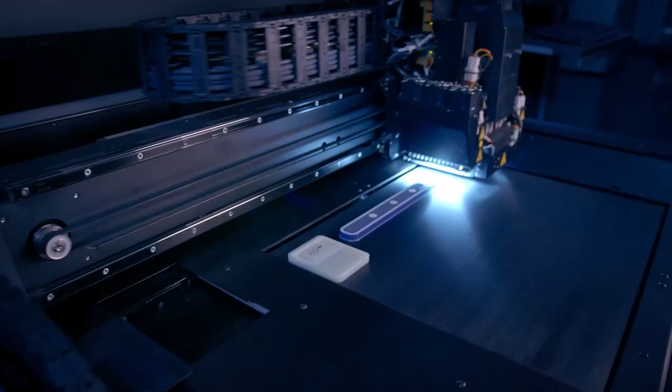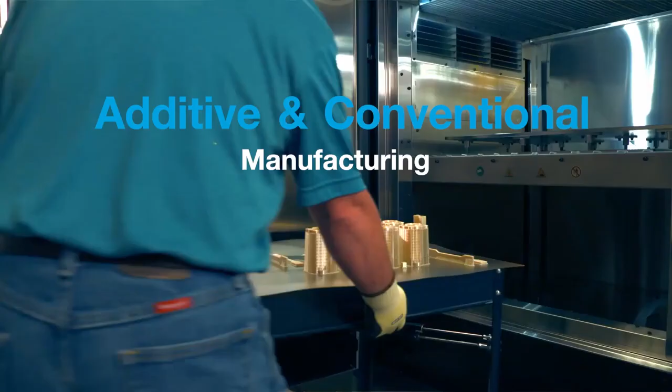Stratasys Direct Manufacturing is the leader in advanced manufacturing and 3D printing services. We have more than 30 years of experience in additive and conventional manufacturing, providing rapid prototyping and production parts backed by highly skilled experts.

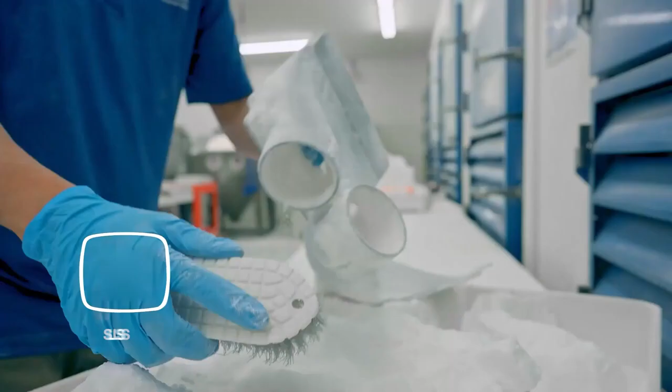Stratasys Direct allows customers to design, innovate, and meet demands of any scale by providing access to FDM, PolyJet, stereolithography, laser sintering, SAF, MJF, P3 DLP, as well as conventional technologies such as injection molding.

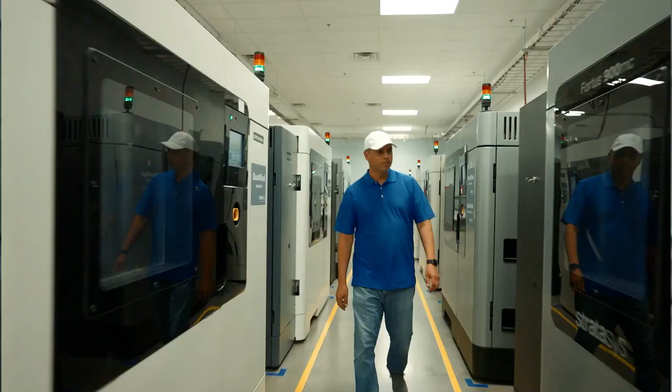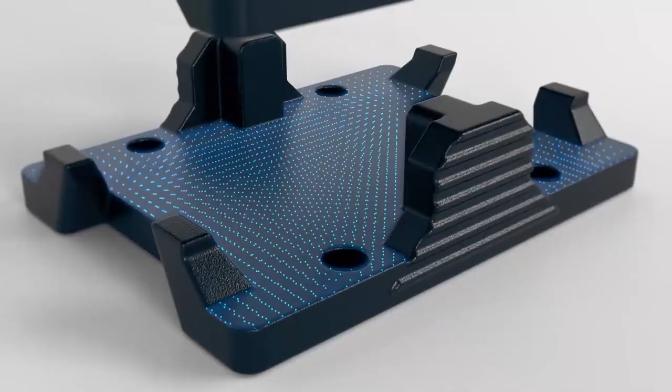What sets Stratasys Direct apart is our huge capacity. We have 200 industrial-grade printers and 3 additive manufacturing facilities, serving all our customers' needs, from prototyping to end-use production. We come alongside our customers to provide extra capacity and expertise, delivering parts in less time than traditional methods.

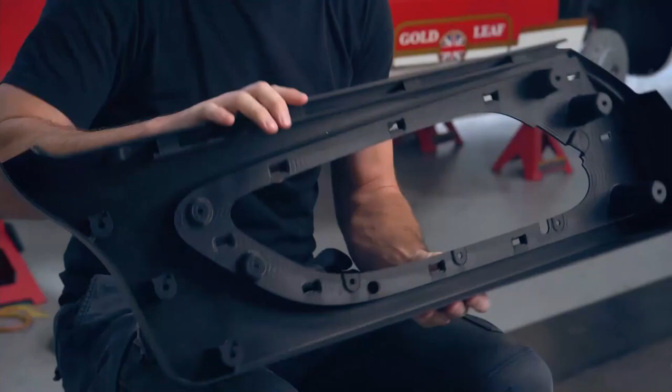Stratasys Direct understands the manufacturing process from start to finish, whether it's designing parts, building functional or cosmetic prototypes, or making end-use parts. We know the business of 3D printing.

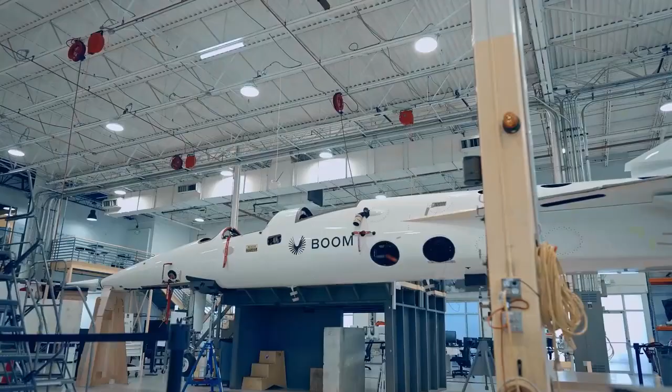We excel at high-requirement production of plastic parts, which is why regulated industries like aerospace, automotive, and medical choose Stratasys Direct.

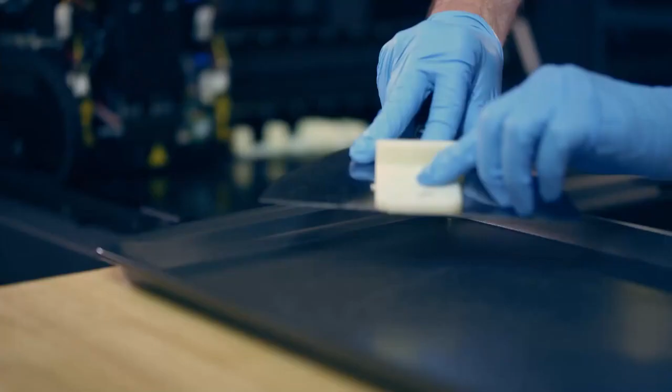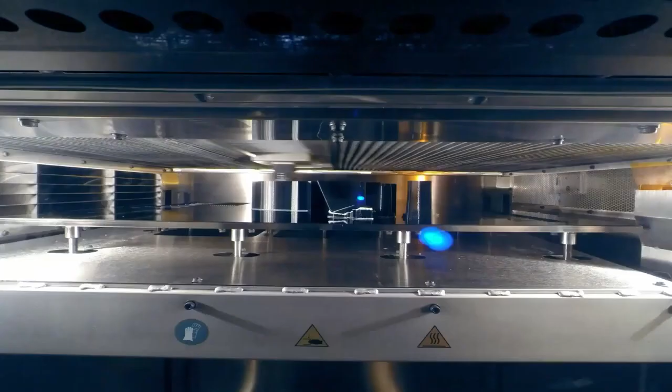We have a full suite of secondary processing and finishing services to make parts as beautiful as they are functional. Quality is vital in our business, which is why we've invested in world-class quality management systems to ensure projects are done right, on time, and on budget.

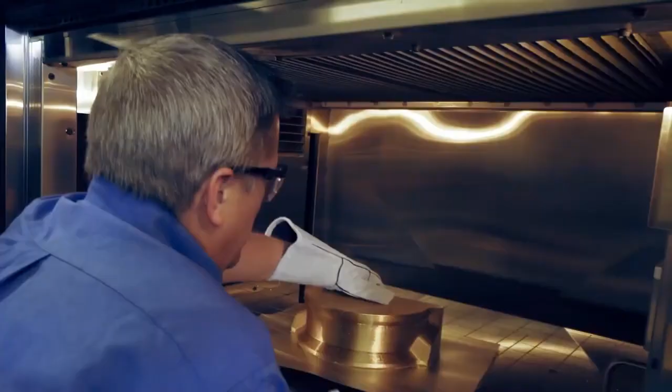From part design to manufacturing and inspection, Stratasys Direct brings quality products to market faster.